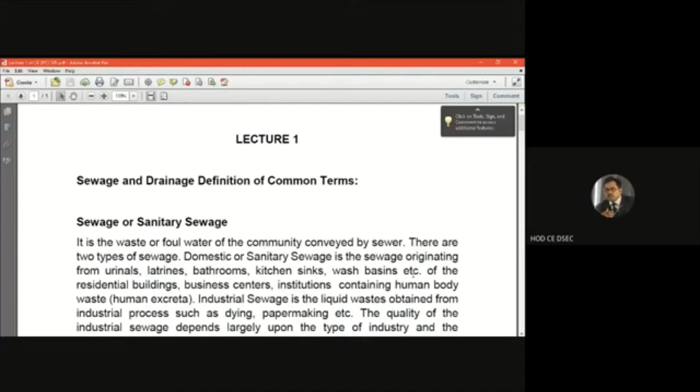Another type of sewage is called industrial sewage, and that is the liquid waste obtained from industrial processes such as dyeing, paper making, paint industries, iron steel industries, thermal power plant, milk dairy industries, and tannery wastewater, that is tannery industries.

Because in a developing country, development is inevitable. For that the industries are there. Day-to-day processing in the industry requires water, and the wastewater which emerges from the industry is called industrial waste.

So sewage is mainly of two types. One is the domestic or sanitary sewage, mainly from buildings, residential or commercial, which we just discussed, and the wastewater from the industrial process, called industrial waste or industrial sewage. The quality of industrial sewage depends largely upon the type of industry.

For example, in the chrome tannery industry, the chrome tanning process is there, and chromium is a very toxic element, and it is also carcinogenic. So it definitely depends on the type of industry, what type of wastewater is there, and what chemicals are used in the process.

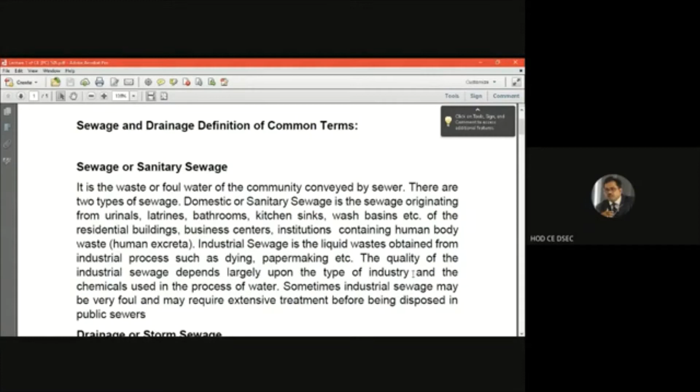This is the thing. Now coming to the point of this definition and terminology, first you have to acquaint yourself before the beginning of this course, Environmental Engineering 2. Now the terminology I am going to use: drainage or storm sewage.

Storm sewage means, as I use the word storm, it is basically the runoff resulting from rain storms - this is rainwater surface runoff after the rain falls. When the surface runoff arises, it was earlier used as storm sewage, but in modern terminology, in modern approach, it is simply called drainage.

So basically drainage and storm drainage are synonymous, rather I would say. So basically, drainage and storm sewage is nothing but sewage - that is the water collected from storms, rain storms, and collected from surface runoff.

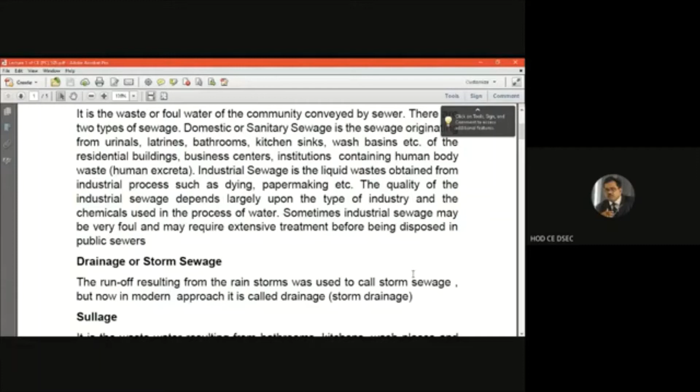Then, sullage - what is sullage? It is the wastewater resulting from bathrooms, kitchens, wash places and wash basins. Points to be noted, my dear students: here the sullage which I am using may be wastewater

but it does not contain any wastewater from latrine or urinal. I am highlighting only the water from the bathrooms, that is the bathing water, kitchens, wash places and wash basins.

So what does it indicate? It indicates that it does not include discharge from latrine, or if you consider an institutional building like a hospital, the operation theater, which has a high content of organic matter.

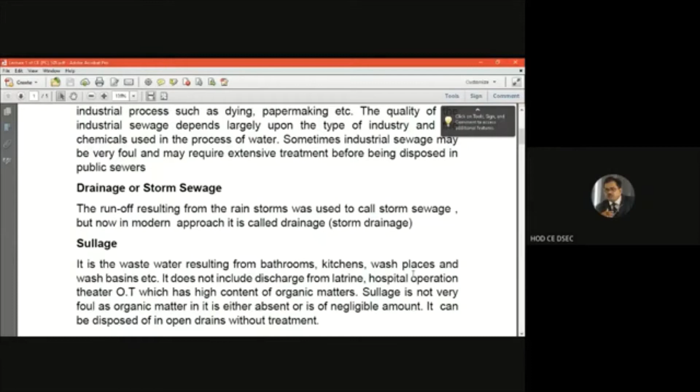So this sullage is not very foul, as organic matter in it is either absent or negligible in amount. It can be disposed of in open drains without treatment, because it is not as harmful as the foul characteristics of the pure wastewater seen in sanitary sewage and industrial sewage.

So it is a different characteristic of wastewater. A part of the wastewater specifically, categorically, we have mentioned from which area it emerges, where the organic matter is nil or very negligible amount, and that is only possible if it is from the bathroom or from the wash basin

or wash places and from kitchens, floor wash, etc., but not from latrine and the toilet and hospital operation theater, which highly contain organic matters.

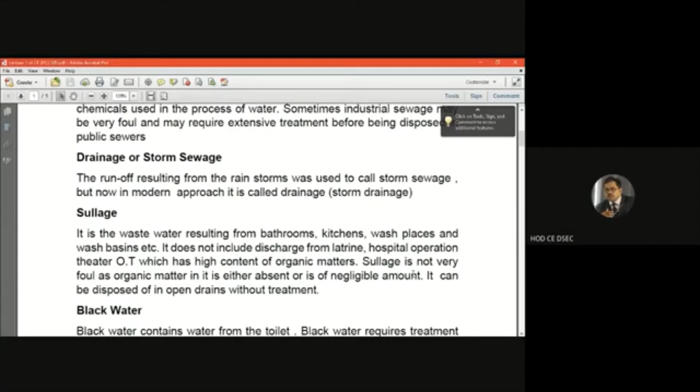Black water. What is black water? Black water contains water from the toilet. It requires treatment by chemical or biological agents and finally disinfection. Black water is not suitable for use indoors after any treatment. Rather, in true sense, all sewage, industrial sewage or sanitary sewage, but not storm sewage, may be considered as black water, which directly emerges from toilets, latrines, urinals, etc.

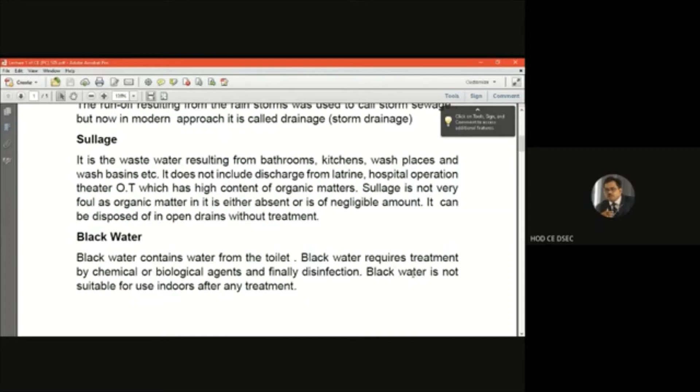But what is grey water? Grey water is the contaminated or used water that does not contain sewage but may contain chemicals. It can come from baths, showers, sinks or washing machines. Grey water can be used on gardens if it is either treated or not stored for more than 24 hours. So in true sense, grey water versus sanitary sewage or industrial wastewater, which is black water, that is the difference between black water and grey water.

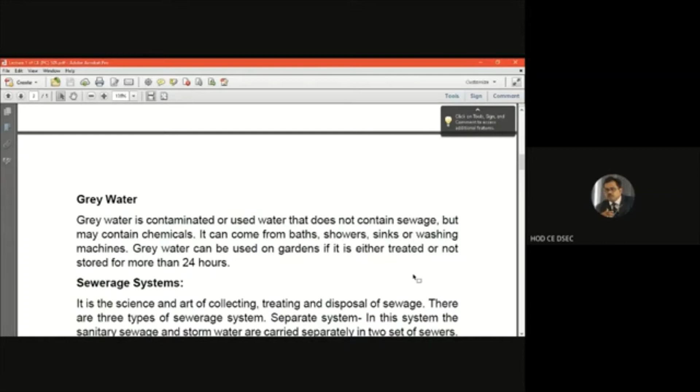Let us discuss the sewerage systems. Slowly I am entering into the sewerage systems containing the wastewater, which is in your syllabus. A sewerage system is the science and art of collecting, treating and disposing of sewage.

There are three types of sewerage system: one is the separate system, second is the combined system, and third is the partial separate system. Partial system means it is both separate as well as combined.

Now what is the separate system? In this system, the sanitary sewage and storm water or drain water are carried separately in two sets of sewers. That means there are two pipelines, two conveying systems, dedicated, one for the sanitary sewage and another for the storm water. So the name indicates separate system because two sewers are there for conveying sanitary sewage and storm water separately.

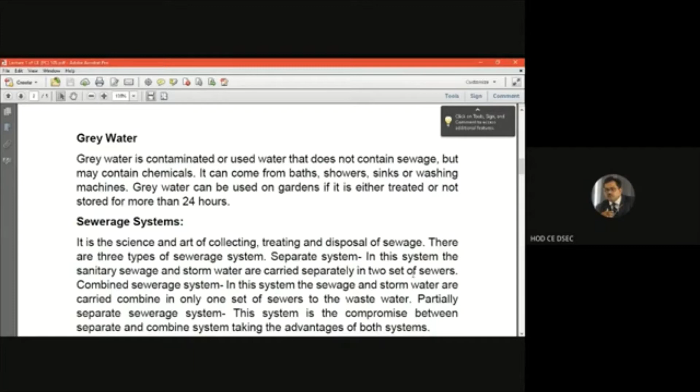Now what is the combined sewerage system? In this system, the sewage, that means sanitary sewage or industrial sewage, and the storm water, that is the drainage, are carried combined in only one set of sewers to the wastewater. So a single pipeline carrying both the sewage and the stormwater is called the combined sewage system.

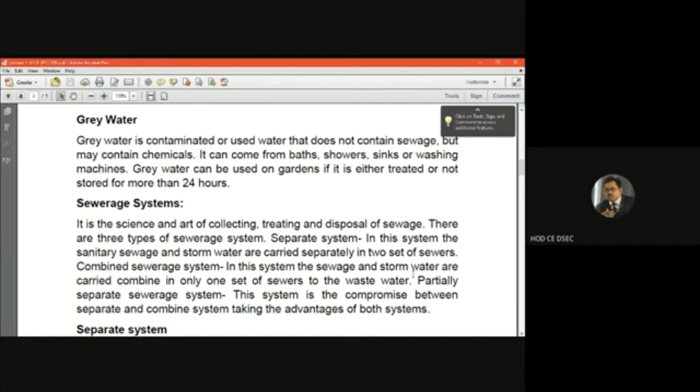Partially separate sewage system means it is the compromise between the separate and combined system, taking advantage of both systems. So all these systems, separate, combined and partially separate, will be decided based on suitability, local advantages, and local terrain. We will discuss elaborately how the applicability of this sewage system depends on various factors, case to case basis.

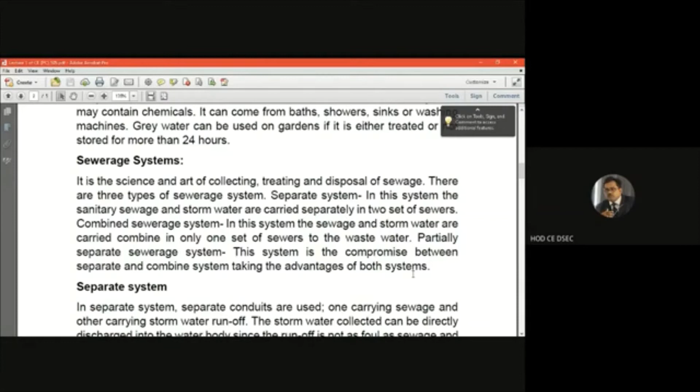In detail, if we discuss the separate system, we have seen separate conduits are there: one for sewage and another for water runoff, that is storm runoff. The stormwater collected can be directly discharged into the water body because it does not require any treatment. It does not have foul water or foul gases. It is purely rainwater, so we can discharge it into the water body without any treatment.

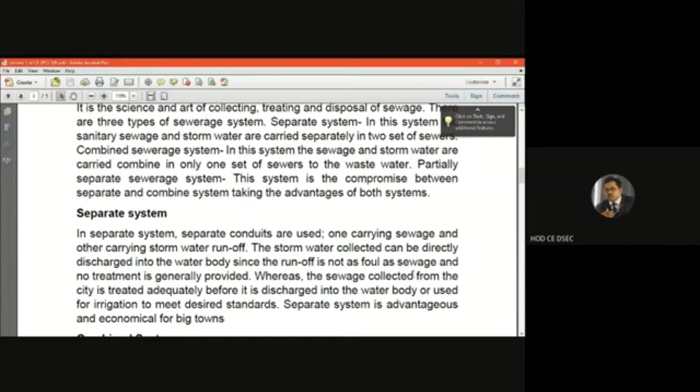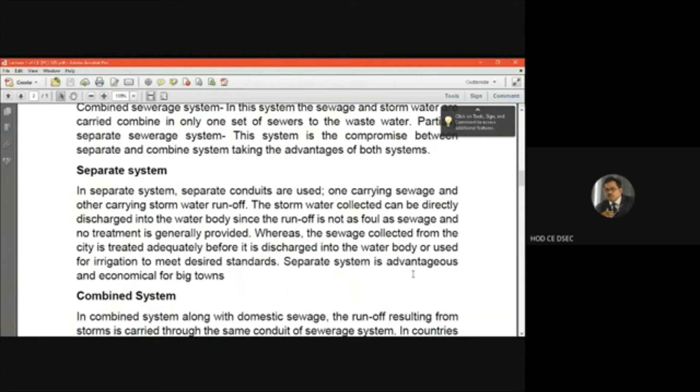In separate system, the storm pipeline can fall into natural sources without treatment. But the sewage collected from the city is treated adequately before it is discharged into the water body. After treatment, it can be used for irrigation and miscellaneous purposes to meet desired standards. So the separate system is advantageous and economical for big towns, where the town size is big. We will elaborately discuss the applicability in detail as per the conditions.

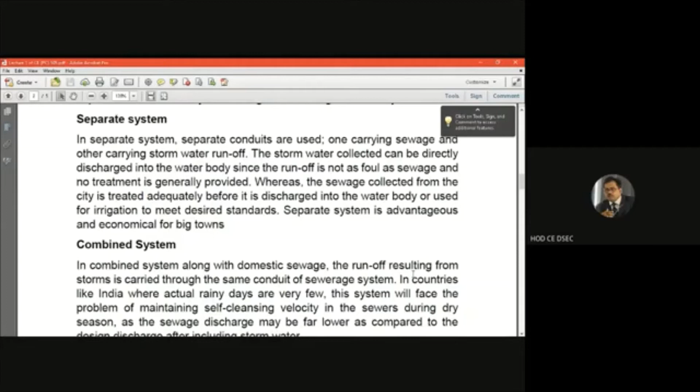Now, after the separate system, let me say a few words about the combined system. As discussed earlier, in the combined system, along with domestic sewage from residential and commercial buildings, the storm runoff resulting from storms is also carried through the same conduit of the sewerage system. In countries like India, where actual rainy days are very few, this system will face the problem of maintaining self-cleaning velocity in the sewers during the dry season, because we have designed one big sewer pipe containing both sanitary sewage and storm sewage. But what happens in the dry season if there is no rain? The storm sewage part will be nil, and only the sanitary sewage will be carrying through the whole pipe.

Then there is a problem for maintaining the self-cleaning velocity, and for that some silt will be precipitated because flow is not adequate. That means it will not be properly applicable for that case, and discharge may be far lower as compared to the design discharge after including storm water.

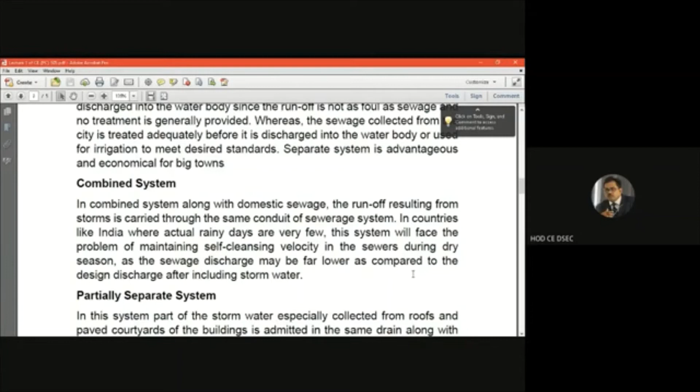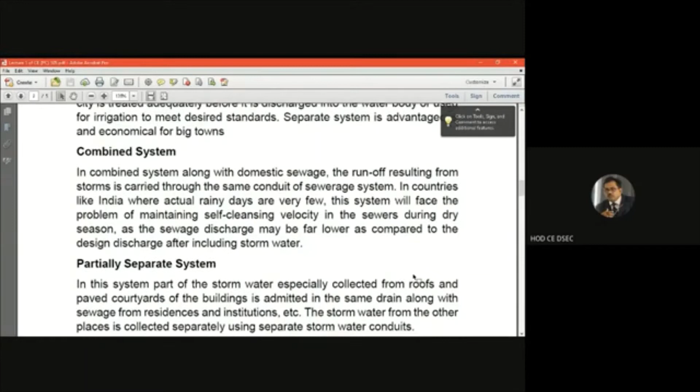So this problem I am highlighting where the combined system has to be applied and where the separate system has to be applied. Now, if we talk about the partially separate system...

In this system, part of the storm water specially collected from roofs and paved courtyards of the buildings is admitted into the same drain, because in our building the rainwater pipes collect the rainwater. So definitely we can consider that rainwater as storm water. Also the water which falls on the courtyards and pavements of our buildings can be passed through the same drain where the building sanitary sewage also passes.

So we are admitting some partial rainwater, not the whole rainwater of the city. For the area specifically, I am highlighting the roofs and the courtyards of the building. In the same drain, which is constructed for the sewerage, along with the sewage of residences or institutions, we pass the storm water falling on the roof and courtyards.

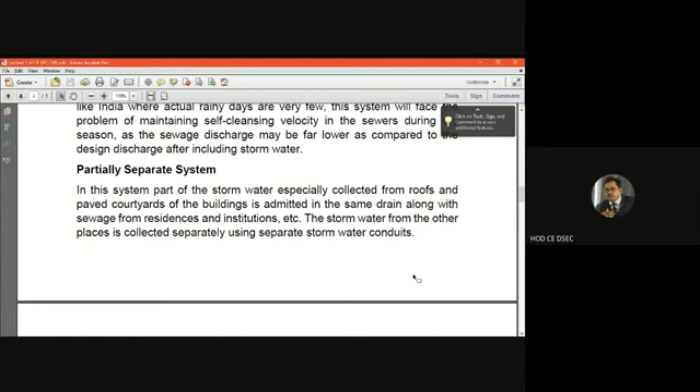Then the stormwater from other places is collected separately using separate stormwater conduits. So it is a classic example of a partially separate system. That means I am taking advantage of combining sanitary sewage with partial stormwater, meaning the portion which falls on the roof, courtyard, institutions and pavements, while the balance of stormwater from external surfaces like roads and other places is collected separately using separate stormwater conduits.

It is very, very important to see the applicability of the separate system, the combined system, as well as the partially separate system. We will go into detail on the applicability portion.

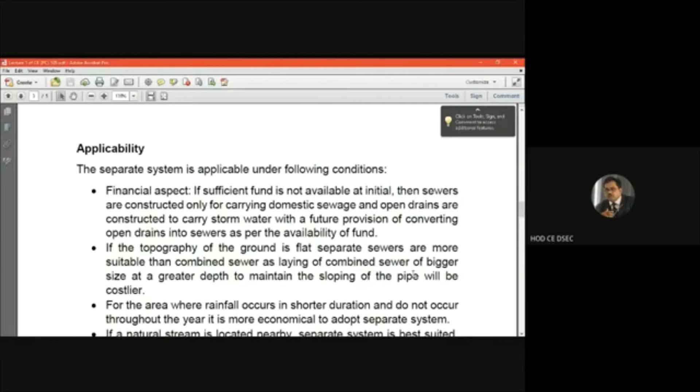Now let us consider the applicability of the separate system under the following conditions. There are cases where the separate system will be applicable, cases where the combined system will be applicable, and cases where we can take advantage of either the separate or the combined system.

Let us discuss the first point, the financial aspect. If sufficient fund is not available initially, then sewers are constructed only for carrying domestic sewage, and open drains are constructed to carry storm water, with a future provision of converting open drains into sewers as per availability of fund.

Suppose we are going to lay pipes but don't have funds. Fund is not permitting us to lay a big diameter pipe, so instead an open drain can be made for the storm water. Due to financial crisis or non-availability of fund, we can go for a lower size sewer for the sewage part, and let it be open drains for the time being for the stormwater. Later, if funds become available, the open drain for stormwater can be converted into sewers.

So all these things depend on the financial aspect, whether you will put a combined sewer, or a separate sewer, or a separate sewer but in different form - one being a piping system and another a drainage system, the open drain system.

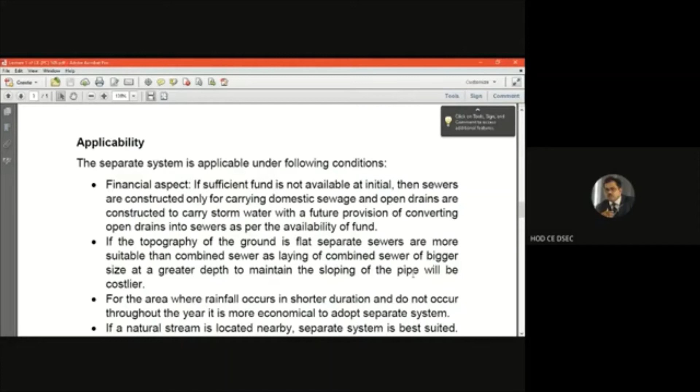Third factor regarding applicability: the area where rainfall occurs in shorter duration and does not occur throughout the year. It is more economical to operate a separate system, because if rainfall is not uniform and occurs for a short duration, then if we go for a larger combined sewer, most of the time the flow will be less, and self-cleansing velocity will not be there. Silt precipitation will happen and it will damage the pipe. So for areas where rainfall occurs in shorter duration, the decision is always to go for the separate sewer, which is much more economical compared to combined.

If a natural stream is found located nearby, site location becomes a very important decision maker. If a natural stream or river is located nearby, then a separate system is best suited, because the stormwater from the separate sewer system can be disposed into the natural stream nearby, while the sewage in the separate sewer is sent to the treatment plant for further treatment. So there is a possibility to discharge stormwater directly into the natural stream, which would not have been possible without treatment in a combined system.

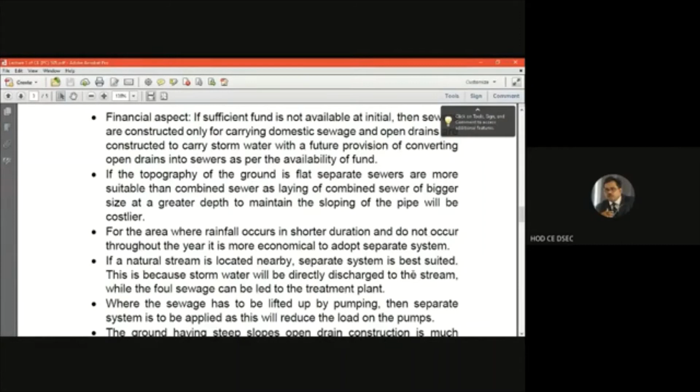Where sewage has to be lifted by pumping, the pumping cost depends on the volume of water. So for pumping cases, lifting wastewater, the separate system will be much more effective than the combined one, because it reduces load on the pumps. In a combined system the volume of water will be more, creating more load on the pumps. So where lifting by pumping is involved, the separate system has to be applied.

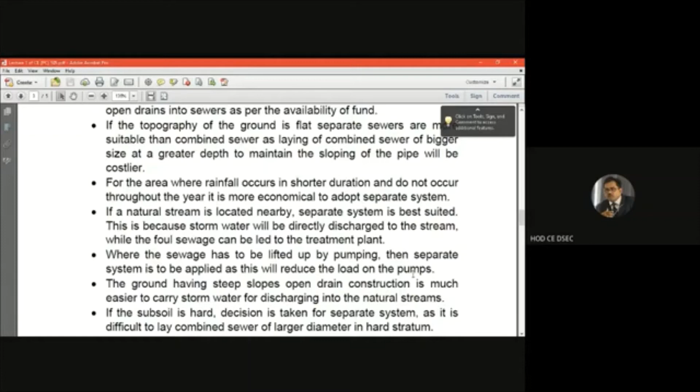For ground having steep slopes, as opposed to flat slopes discussed earlier, open drain construction is much easier to carry storm water for discharging into natural streams, because the open drain follows the ground terrain and automatically flows by gravity to the natural stream. So there's no need for a separate piping sewer system. If we cut the open drain following the natural sloping terrain, it becomes much more effective to dispose storm water into natural streams.

Now let us consider the condition of the subsoil, which is also a factor for deciding installation of separate or combined systems. If the subsoil is hard, such as rock or hard soil, the decision is taken for a separate system, as it is difficult to lay a combined sewer, which requires large diameter pipes in hard stratum.

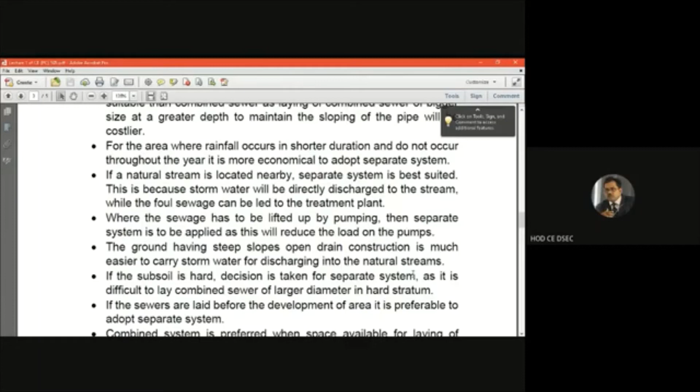If the sewers are laid before the development of the area, while development is still in process and full development has not yet been arrived at, it is preferable to adopt the separate system.

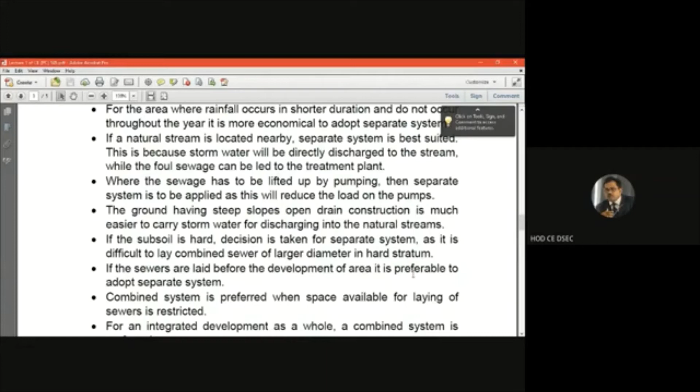Combined system is preferred when space available for laying sewers is restricted. When we don't have required width for laying sewer lines, it becomes very difficult to lay a combined sewer for a large area because the area is restricted. So in this specific case of area restriction, we have to go for the combined system.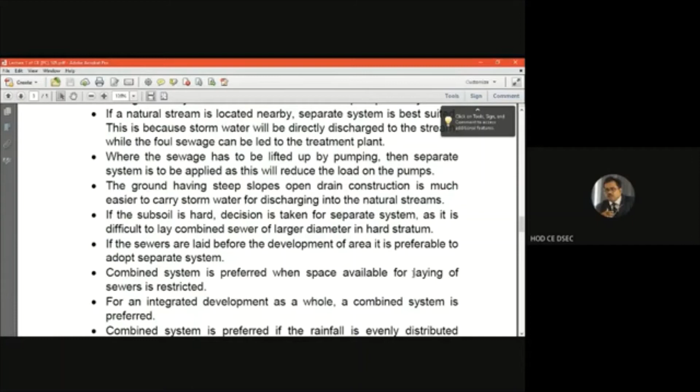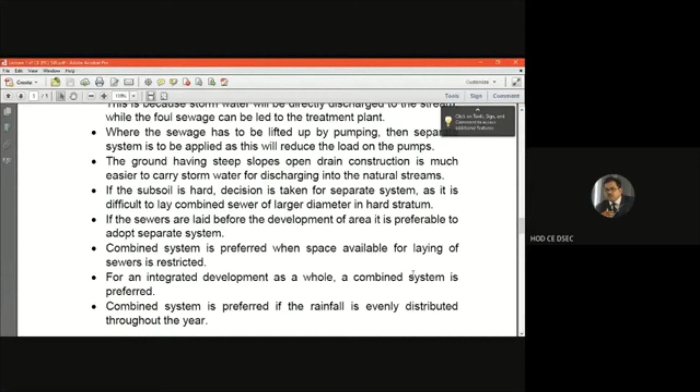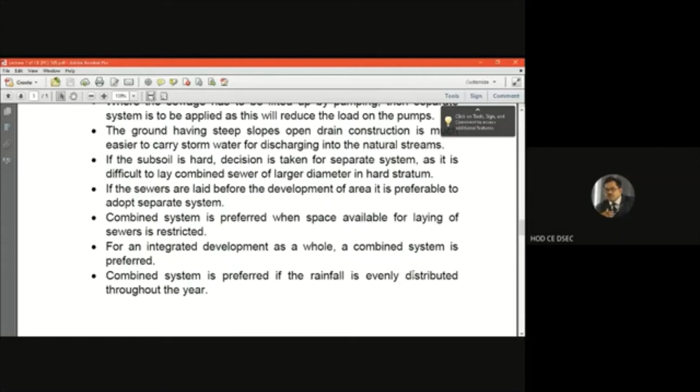For an integrated development as a whole, a combined system is preferred. Integrated development means not only sewerage development but other activities too, so it is done in a combined manner. Combined system is also preferred if rainfall is evenly distributed throughout the year, because then storm water quantity is ensured, and there is no problem of non-availability of self-cleansing velocity. Silt precipitation can be avoided, so combined system is preferred where rainfall is distributed evenly through the year.

Before going through the advantages and disadvantages of different sewerage systems, one terminology I have highlighted specifically is the self-cleansing velocity in the sewer. It is a very important terminology that we mentioned in the last lecture, but let me explain what we mean by self-cleansing velocity.

It is basically the velocity at which the solid particles will remain in suspension without settling at the bottom of the sewer. This indicates that as a designer, we have to maintain the minimum self-cleansing velocity of the sewage so that solid particles in the waste remain in suspension, and settling of particles won't be allowed, which would produce silting in the sewer system. It is that velocity at which even the scour of already deposited particles at a given site will take place.

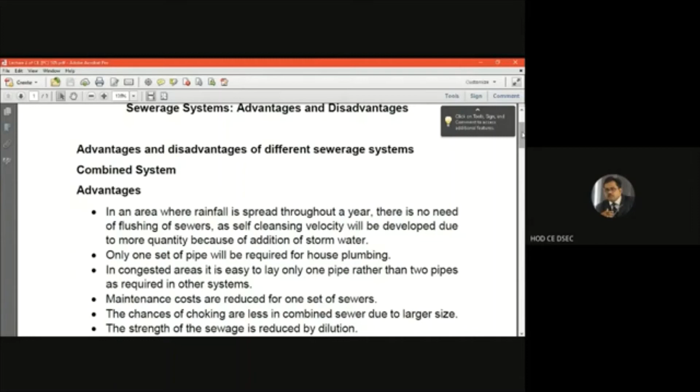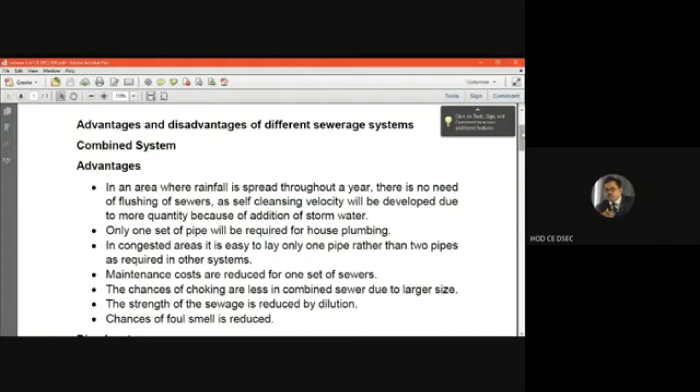Maintenance cost is definitely reduced, as we have to maintain a single pipe rather than separate two pipes. Chances of choking are less in a combined sewer due to the larger size, since the diameter of the pipe is more. The suspended particle materials flowing in the sewage typically cause choking in smaller diameter pipes, but since the cross section and diameter are larger in a combined sewer, the chances of choking will be less.

The strength of the sewage is reduced by dilution, because storm water is rainwater, which is clear water without any foul or contaminant matter. It dilutes the sanitary sewage, so the strength of the sewage is reduced. This means more efficient treatment can be done, because diluted wastewater can be treated very efficiently rather than raw wastewater, which requires more reagents and larger treatment area. That is one advantage of the combined sewerage system, a single pipe system where rainstorm water is mixed with sanitary sewage, diluting it and making treatment more efficient.

Chances of foul smell are reduced. As the rainwater, that is storm water, is mixed with the sanitary sewage water, domestic or commercial, the strength of the wastewater gets reduced, and automatically the foul smell is reduced. These are the advantages of the combined sewerage system.

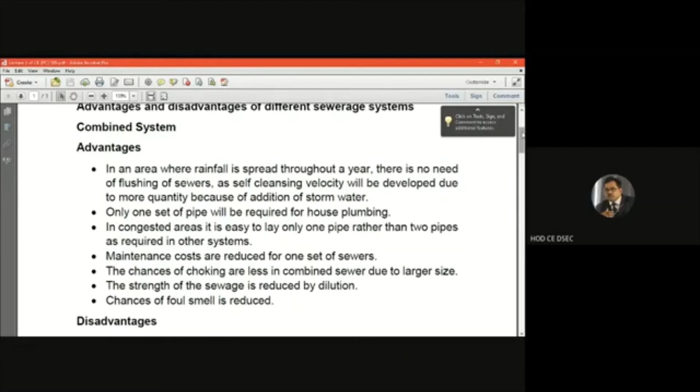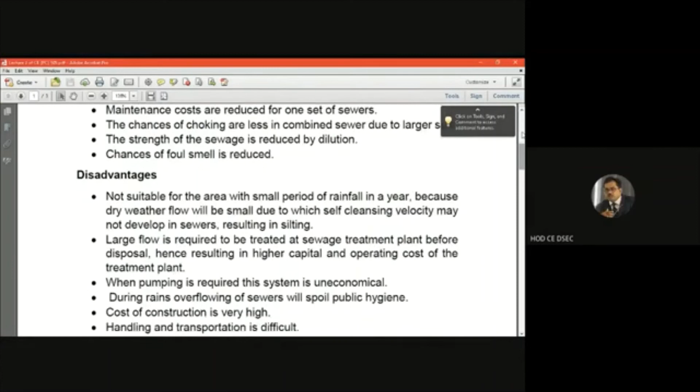Now let us see the disadvantages of the combined system, because every sewerage system we discussed in the earlier lecture has both advantages and disadvantages. Let us see what are the disadvantages of the combined sewerage system.

It is not suitable for areas with a small period of rainfall, because dry weather flow will be small, due to which self-cleansing velocity may not develop in the sewers, resulting in silting. If rain is not there in the dry season, the flow will be low and self-cleansing velocity will not be developed, resulting in silting, that is the settlement of suspended particles, taking place in the sewers.

The second disadvantage is that a large flow is required to be treated at the sewage treatment plant before disposal, resulting in higher capital and operating cost of the treatment plant. Since the storm water is added to the sanitary sewage, the volume of water to be treated is much more, because this combined sewage cannot be disposed to the natural water system without treatment. Since double flow is flowing, sanitary sewage and storm water sewage, the large flow treated in the plant increases the capital and operating cost.

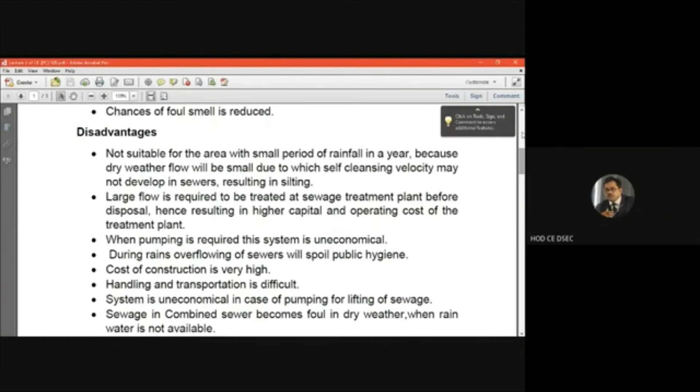The combined system is uneconomical in case of pumping for lifting sewage, as seen earlier, because the load is much more on the pumping system, so it is not suitable for pumping systems for lifting the sewage.

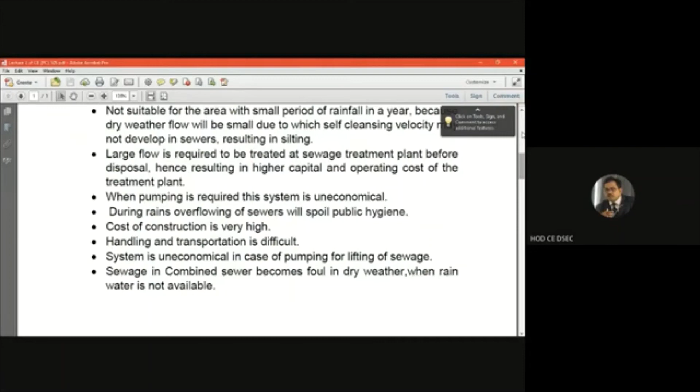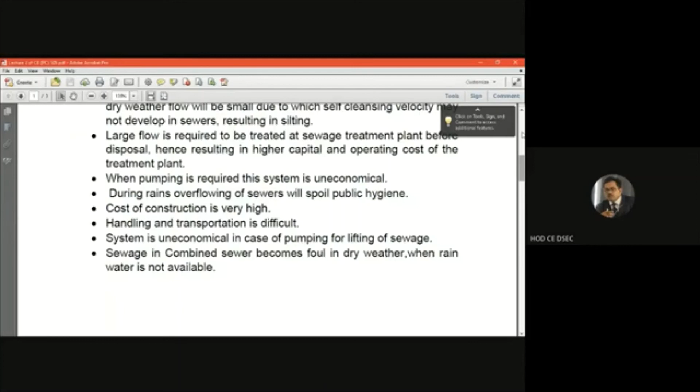In the combined sewage system, sewage becomes foul in dry weather if rainwater is not available. If rainwater is available, then it is diluted and no fouling takes place, or fouling is reduced and taken care of. But in dry weather, when there is no rain, the sewage in the combined sewer becomes foul, and that is one of the disadvantages of the combined sewerage system.

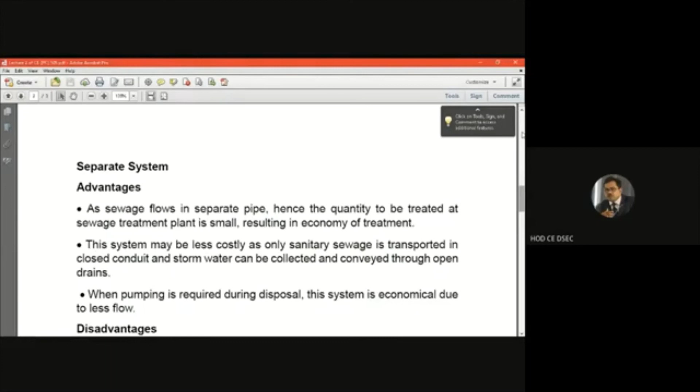Let me talk about the advantages and disadvantages of the separate system. Advantages of the separate system.

The first advantage is that since sewage flows in a separate pipe, the quantity to be treated at the sewage treatment plant is small, resulting in economy of treatment, because the storm water flows in a different separate sewer, so there is no need for treatment there. It can be disposed directly to a natural water surface like a river or stream, with no need to send it to the treatment plant. The sewage treatment plant handles only domestic or industrial sewage, not the storm water part, since storm water is separately carried and disposed to the natural river stream system.

Second advantage of the separate system is this system may be less costly, as only sanitary sewage is transported in closed conduit, and storm water can be collected and conveyed through open drain. In open brick drains, there is no need for separate piping for the storm water, so the cost will definitely be less.

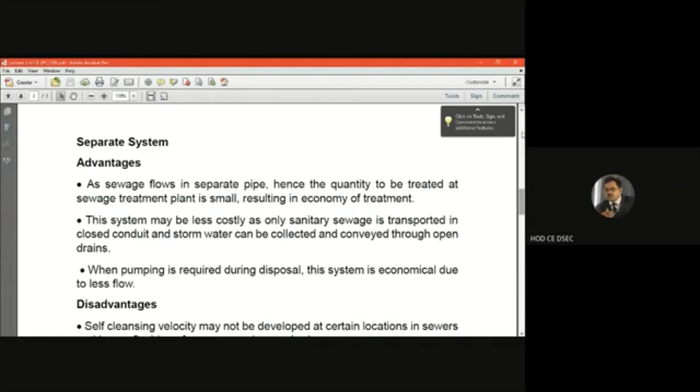Now let us see the disadvantages of the separate system. First, self-cleansing velocity may not be developed at certain locations in the sewers. Hence, flushing of sewers may be required.

This happens because in a separate system, if there is no stormwater flow, it becomes a dry condition, and problems may arise. This system also requires laying two sets of pipes, which may be difficult in congested areas. In congested areas, we will always prefer a single combined sewerage pipe, because laying two independent separate pipes, one for sanitary sewage and one for stormwater, is very difficult.

Another disadvantage of the separate system is that it requires maintenance of two sets of pipelines, and hence the maintenance cost is more compared to the combined system. In a single pipe system maintenance would have been easier, but in the separate system, since two sewer systems are involved, double the maintenance has to be taken care of, so the cost is more.

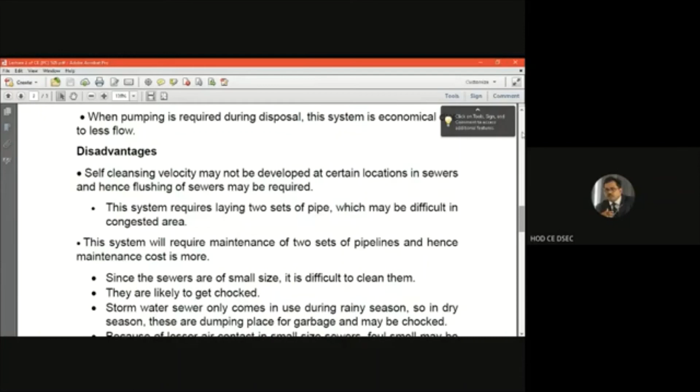Since the sewers are of small size, it is difficult to clean them. There is a probable chance of choking, as the diameter of the pipe is less here, compared to the bigger diameter in the combined system. So there is a high chance of the materials choking the system, and that is definitely going to happen.

Stormwater sewer only comes into use during the rainy season. So in dry season, these are used as a dumping ground for garbage and may get choked. That is a major disadvantage in this separate system.

Finally, the disadvantage corresponding to the separate system is that because of lesser air contact in smaller size sewers, foul smell may be there due to sewage gas formed. Because there is a chance of lesser air contact due to smaller diameter and smaller opening, foul smell may be there due to sewage gas formed.

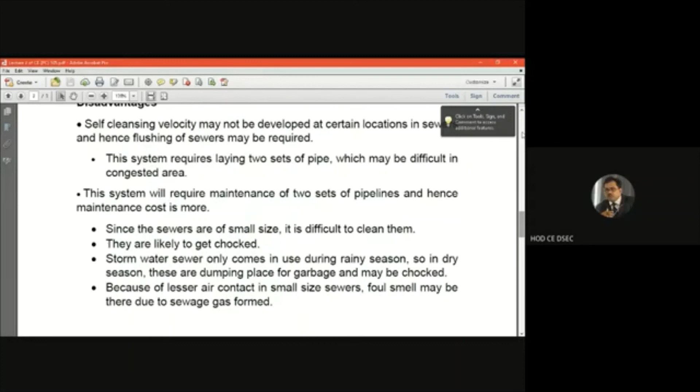Now the last sewerage system, advantages and disadvantages we will discuss, is the partially separate system. Here we take both the advantages of the combined system and the separate system, and the disadvantages of both combined and separate systems also come together here. Let's see what is the advantage of the partially separate system.

It is very economical, and reasonable size sewers are required, so cleaning is not so difficult.

It is not too small, not too large. Too large means it is not too large compared to the combined sewer system. Similarly, it is not too less compared to the separate system, because sometimes in a building, it is partially separate.

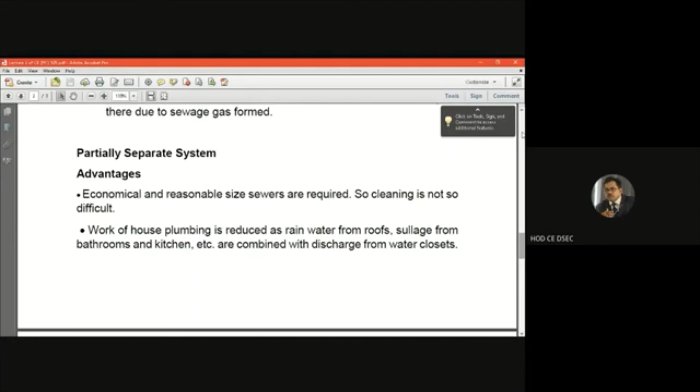The UPVC pipelines, provided as soil pipelines connected from the cisterns, commodes, and WC water closets, and the pipeline from the roofs if connected can flow in the same line. So the plumbing work in the building becomes much easier and more economical, handling rainwater from roofs as well as sullage from bathrooms and kitchens, combined with discharge from water closets.

Flushing of sewers may not be required in small portions because, in the partially separate system, domestic sewage passes through the rainwater in the same system. The rainwater itself maintains the self-cleansing velocity in the sewer, so there is no need for flushing the system or cistern.

A small portion of storm water is allowed to enter the sanitary sewage, so automatically rainwater will flush the sewage from the toilet, meaning no need for flushing. Water consumption will be less because we are using rainwater for this purpose. This is one of the greatest advantages of the partially separate sewage system.

It combines the advantages of both the separate and combined systems, because the partially separate system is a combination effect of the combined system and the separate system.

The storm water permitted in the sewers eliminates the chances of choking. The sewers are completely clean during the rainy season, since rainwater continually passing through the sewer lines avoids the chance of choking from suspended particles and waste materials. The problem of disposing storm water from homes is simplified, because it goes to the public sewer.

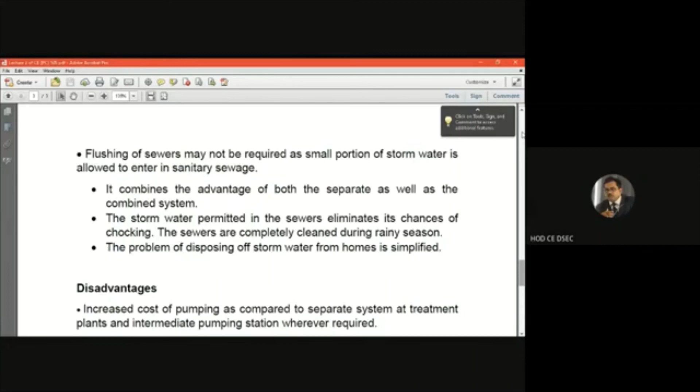Rainwater will go to the public sewer along with the domestic sewage. Now let's see the disadvantages of the partially separate system.

The disadvantage of the partially separate system is that it increases the cost of pumping compared to the separate system. The volume of water will be more, because in this system we are adding rainwater falling on the roof, courtyard, and landscaping of the building. So compared to the separate system, the volume of water is more, which creates load on the pumping and increases the cost of pumping at the treatment plant.

An intermediate pumping station may be required as per necessary conditions. So in dry weather, self-cleansing velocity may not develop in the sewers. Whatever advantages we discussed regarding the rainy season — no need for flushing, natural rainwater clearing choking materials and maintaining self-cleansing velocity — what happens in dry weather?

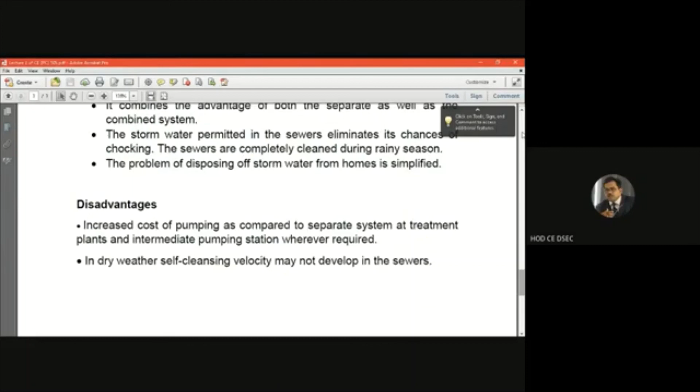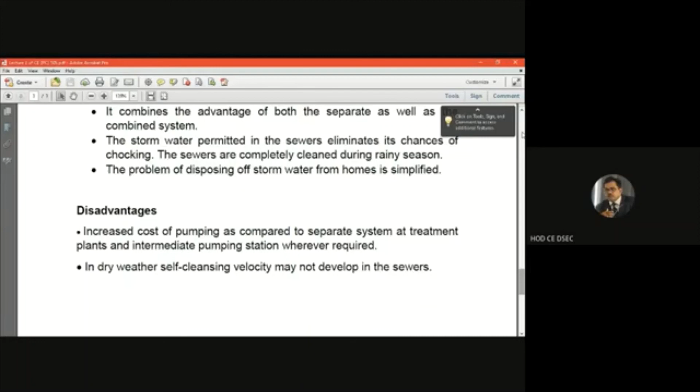Then the disadvantage comes: there is a problem of maintaining self-cleansing velocity, because no rainwater is there. So in dry weather, self-cleansing velocity may not develop in the sewers.

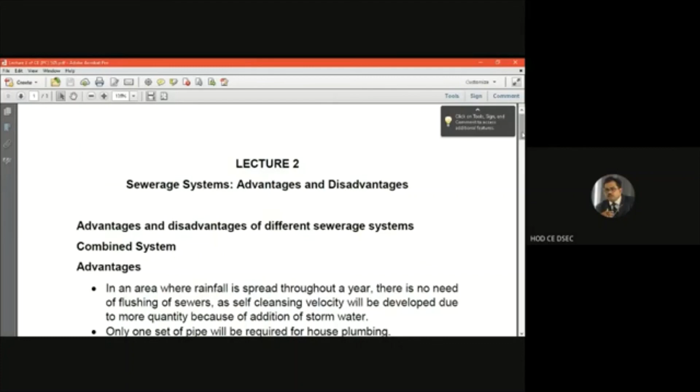From the very beginning of my lectures, I have used the term self-cleansing velocity. It is very important, because a minimum cleaning velocity of sewage in the sewer must be maintained throughout the year to avoid settling or silting of particles at the bottom of the pipes and to maintain the flow. This minimum self-cleansing velocity is required in every system — separate, combined, or partially separate — for maintaining the sewage. So this is all about the sewage system.